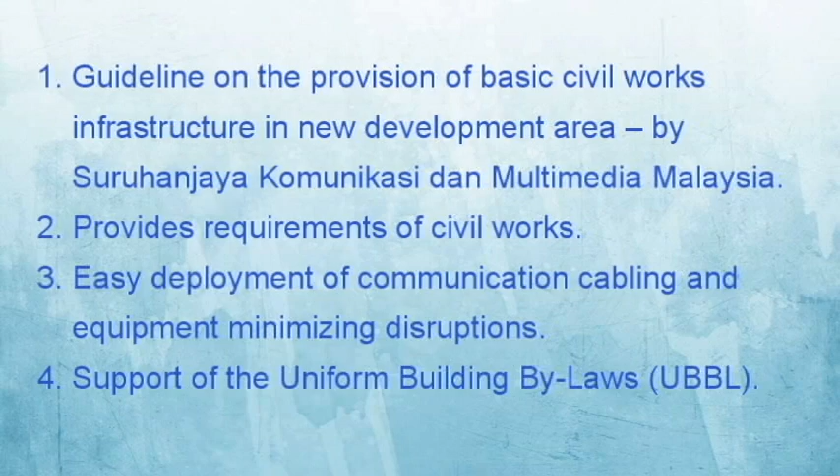This is to ensure easy deployment of communication cabling and equipment, minimizing disruption to the services offered by the service providers in the future. This guideline also serves as a recommendation to developers in support of the Uniform Building By-Laws, UBBL.

And now, I will explain to you the definition of three things. First, civil infrastructure. Second, duct. And third, network service provider. First, civil infrastructure is a basic communication infrastructure installation needed for the establishment of fixed network communication services such as ducts, manholes, and etc. But it does not include a line.

Second, duct. Duct means a single or multi-way duct made of PVC or other materials. An enclosed raceway for wires or cables, usually used in soil or concrete, an enclosure in which air is moved. Third, network service provider. Network service provider is a person who provides network services such as fixed network communication services, for example, Celcom, Maxis, Digi, and Telekom Malaysia.

Next is basic telecommunication infrastructure requirements. First, manhole. A manhole is a large hole in a road or path covered by a metal plate that can be removed. Manholes on the roadside outside the building or compound must be provided so that the service provider can connect their underground network. The developer is strongly advised to consult the service provider on the appropriate selection of the location and also size of manhole to be allocated. Figure 1 shows the typical manhole design.

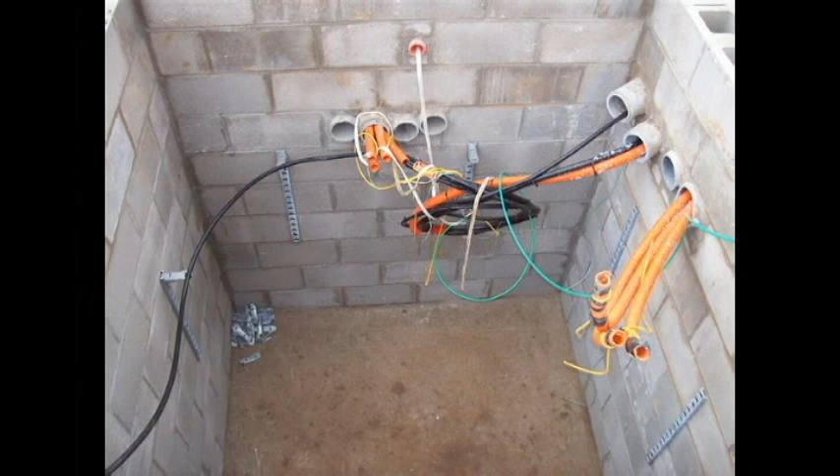Second is ductway. Underground ductways are required to connect the manholes from one to another and to the nearest fixed network communication access point, either communication cabinet, communication room, local exchange, and etc. The number of ductways is dependent upon the size and types of connection and number of potential users or customers in the development areas.

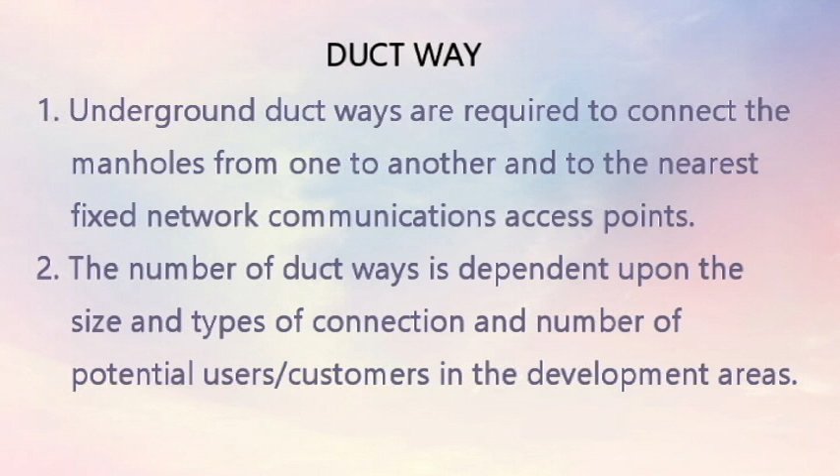The developer is strongly advised to consult the fixed network service provider on the appropriate selection of the number of ductways to be provided so as to accommodate their requirement in the deployment of the communications facility in the development area. The figure shows a manhole with 2 ductways and 4 ductways.

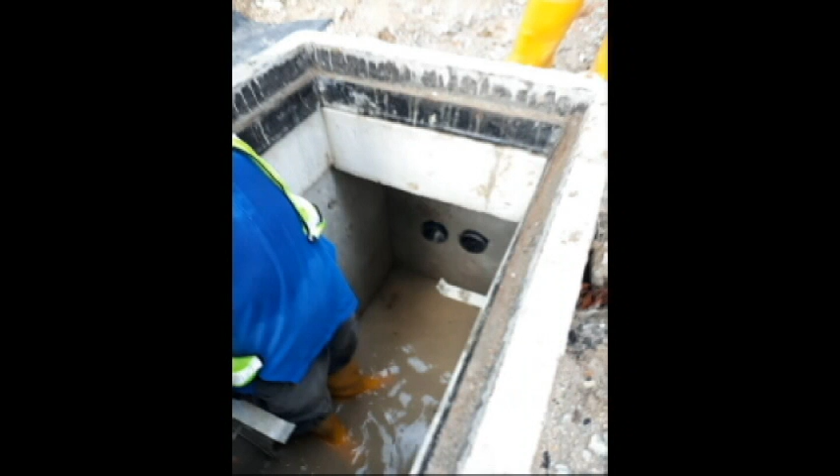I will present about the duct laying. Duct laying has two types, which are clearance from other services and clearance from electricity supply. For the clearance from other services, all ducts, whether asbestos cement, PVC, iron or steel, laid direct in the ground shall be kept well clear of water mains and service pipes, sewers and subways, and manholes and joint boxes belonging to other undertakers.

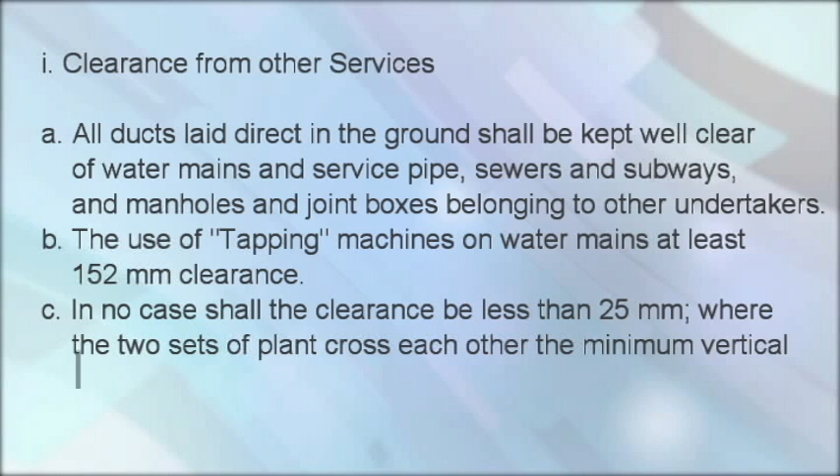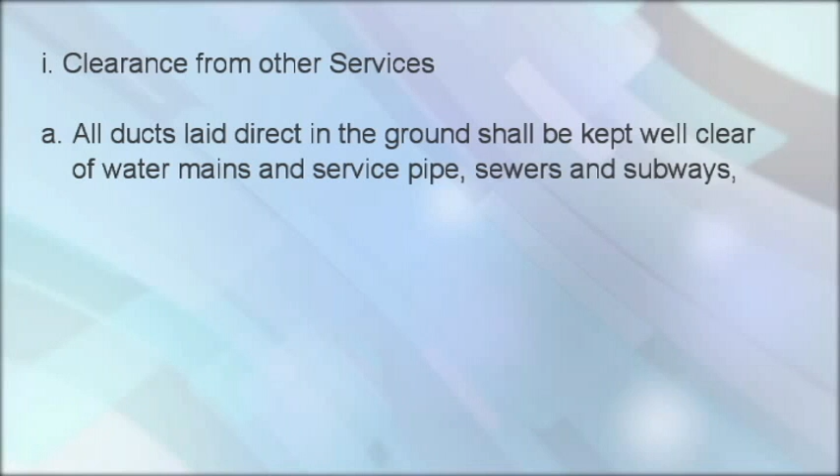In order to permit the use of a tapping machine on water mains, at least 152 mm clearance should be given wherever possible. In no case shall the clearance be less than 25 mm. Where the two sets of plant cross each other, the minimum vertical clearance should be 50 mm, provided the approval has been obtained from the authority concerned.

Next is clearance from electricity supply. As much clearance as is practicable should be given to the bases of electric lamp standards, electricity supply pillars, traffic signal posts, and etc. In the case of electricity supply cables, the following minimum separating distance between the two sets of plant should be provided. A. High voltage single core cable, which is exceeding 650 volts. Standard minimum clearance is 460 mm. No exception to this requirement will be permitted.

B. High voltage multi-core cable, which is exceeding 650 volts. Standard minimum clearance is 300 mm. In difficult cases, a reduced clearance will be permitted.

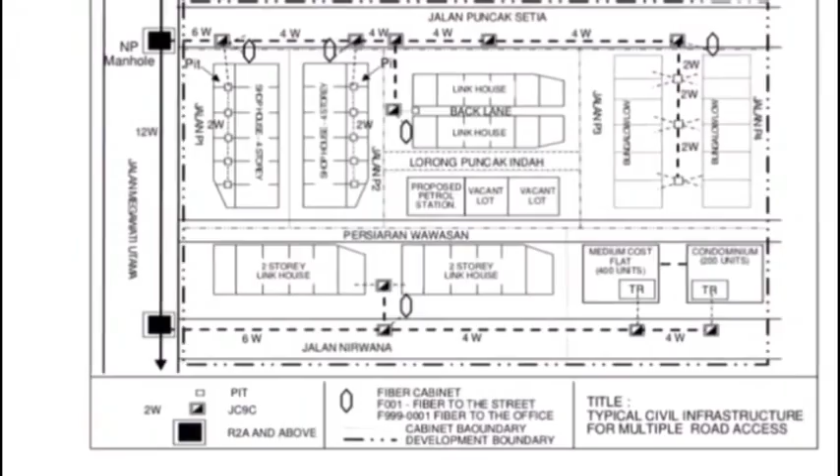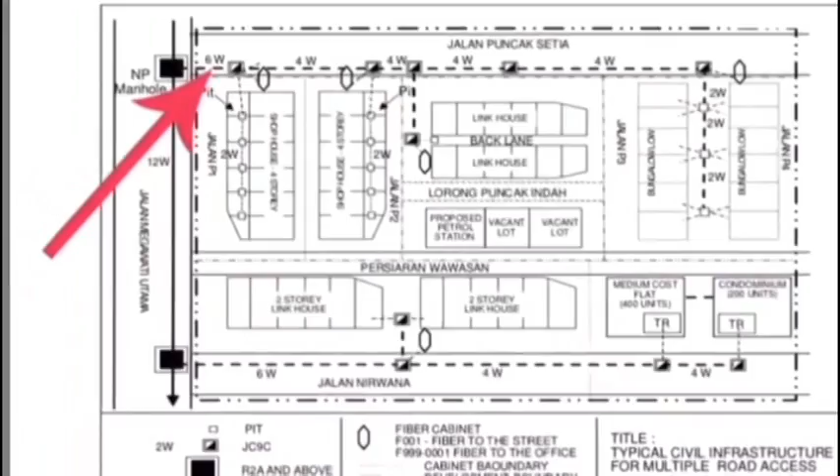This layout plan displays the arrangement of landline of telecommunication system to buildings. The system will start with the manhole placed on the main road, which comprises R2A and above. 6W represents 6 ductways from the R2A manhole to the smaller size manhole called JC9C. From JC9C, it will flow to the fiber cabinet.

Fiber cabinet or FTTC uses the cabinet to connect the ductway from the JC9C manhole to the properties. This is good because no new cables are needed. The telecommunication line will flow through the pit before it supplies to the end user's building.